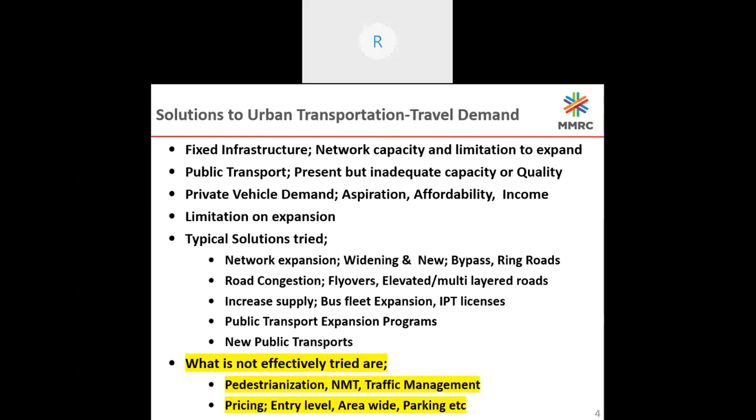So this explains the complexity of the urban transport problem. I would now jump into the Mumbai scenario, because I've been living in Mumbai and working for Mumbai Metropolitan Region for 30 years. That is my Karma Bhumi now.

Greater Mumbai, the metropolitan region, has 11 million public transport trips performed on a daily basis. The combined spread of public transport in terms of suburban railway and bus networks across various towns and bodies is reasonably good. For any of the Indian cities, Mumbai has some of the best public transport spread and network.

But the alarming situation is coming because of overcrowding on trains - it's almost three times the crowd that is going on. Then there's increasing private vehicle usage, quality of public transport deteriorating day by day, and as a result there is a spillover onto private vehicles, which has increased peak hour congestion and traffic congestion.

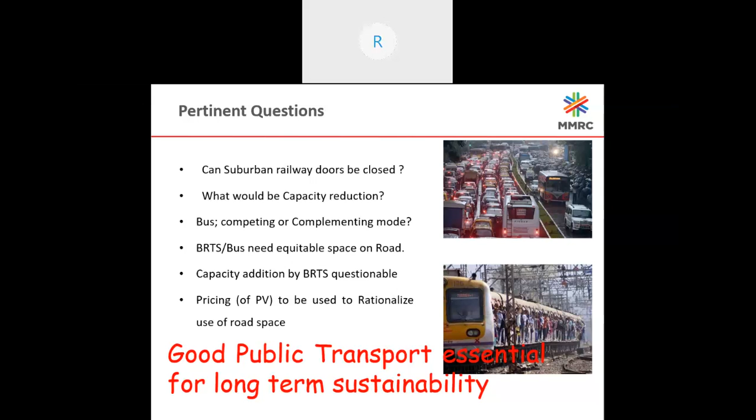BRTS has been thought of but not really implemented. Pricing of private vehicles to be used to rationalize the road space, including parking, but these are not getting implemented as possible. Good public transport is the only solution for the long-term sustainability of cities.

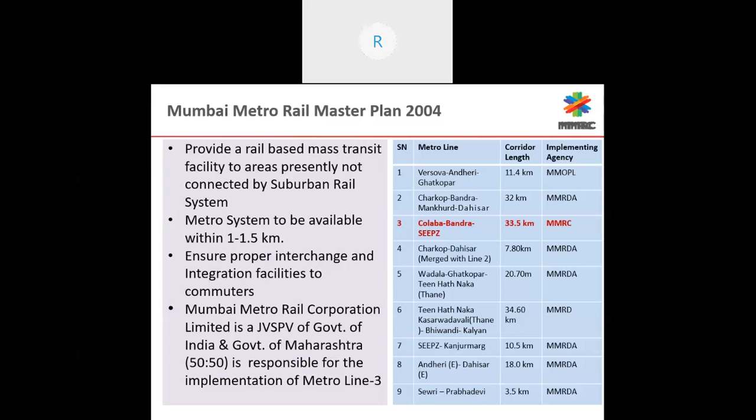And there has to be a public transport station in 1 to 1.5 kilometers throughout the city, ensuring proper interchange between various modes of public transport, including creating multimodal transport integration.

Of course, this network, the metro master plan, has been recently expanded to 150 kilometers network plan with a number of lines, 9 to 14 lines. I am not going into details of this.

So line 3, which I am going to speak about, is the Colaba Bandra SEEPZ red line alignment network. So the red line is line 3.

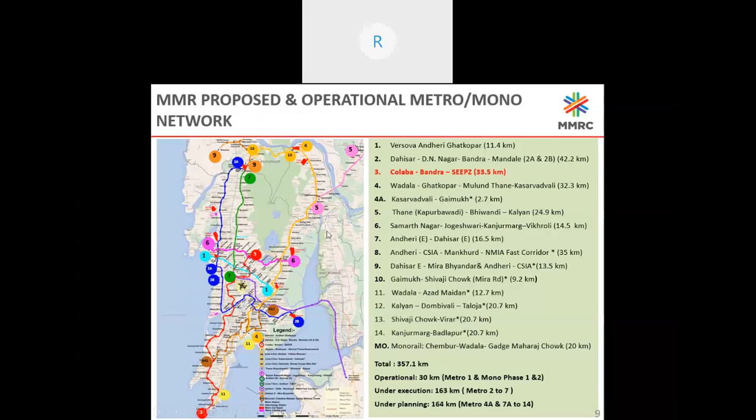So let me go on to the Metro Line 3 area I intend to speak about today, and the challenges we have faced, and how the planning process has gone through. To understand this network, it is a 33.5 kilometer network with 26 underground stations and one at-grade station.

The project cost, when we got it from the Government of India, is 23,136 crores. Near about 57% funding is coming from that. Rest of the funding is coming from the state government.

And of course, the airport concession is also taking a little burden on that. The project implementation was originally scheduled to be around December '21 for the first phase, and June '22 for the second phase. Of course, the Corona COVID situation may take some few more months.

If you want to look at the ridership, in 2021 the line is expected to cater to 13.9 lakh commuter trips daily, and that is expected to grow to 17 lakh. Accordingly, the fleet, that is the rolling stock, is continuing to 31 trains.

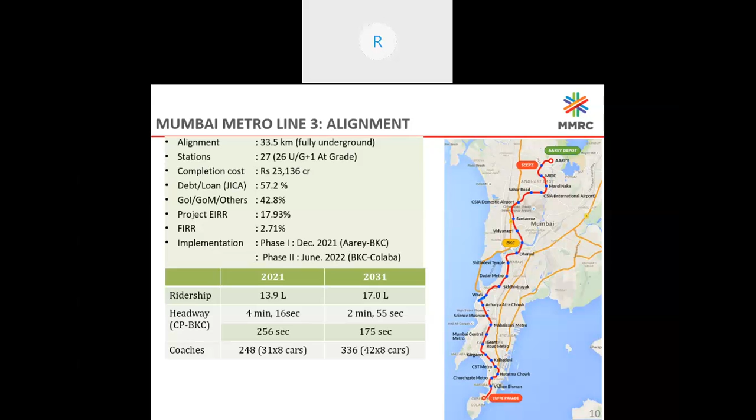Ultimately, we plan to introduce 42 trains. So what does it take for such a mammoth mega project in planning and implementation? I'm going to now focus on the challenges that we have encountered and surmounted in implementing this project.

So in an urban scenario, or for that matter any public funded project, the challenges are more or less common: project feasibility and funding, followed by implementation and an organization to implement it, procurement process and having good contractors on board, then implementation monitoring and project delivery schedule.

Then, since it is a spine-like public transport system, the supporting network, multimodal integration, and last mile connectivity matter, and of course the soft things like fare, non-fare revenue, and ensuring the sustainability of such a system.

In project feasibility and alignment finalization, as I have already mentioned, we created a master plan in 2004. But by 2010-11, when we really started working on this line, there were several things that had changed and several aspirations had changed.

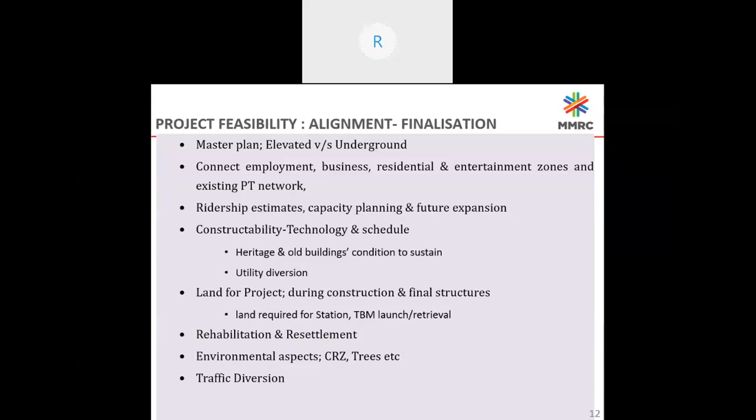The city of Mumbai is full of slums and other infrastructure, so rehabilitation and resettlement is an important factor here. Environmental aspects matter too, being a coastal city—there are tree issues and other environmental issues. And implementation of the project faces the challenge of traffic diversion during construction.

So the alignment has been finalized. While finalizing, we took care of all these aspects, and an alignment has been finalized. So we went to the next steps of the project.

The issues are environmental and neighborhood issues. One may think the city would wholeheartedly support a public transport project like an underground metro system, but I should say yes and no both, because residents get very aggravated—their daily activities are compromised, their emergency services are compromised, and they had to confront the movement of construction trucks and workers and several other things.

Under environmental aspects, we had to go through CRZ clearances—environment and forest clearances, because some mangrove forests had to be cleared—then tree cutting permissions, transplantation permissions, noise, dust and air quality monitoring systems. Air vibration studies have been done, and the construction methodology was decided to limit vibration levels.

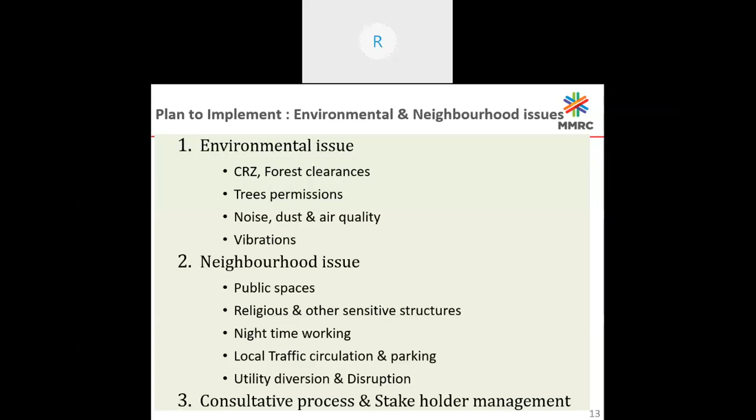To address all these issues, we have undertaken a consultative process right from the start, and it is still continuing. Stakeholder management is an important part of our regular project implementation.

The legal framework and policies are also important. Being a Metro Railway, the central legislation, the Metro Railway Act, needs to be applied. Then the Land Acquisition Act changed in 2013, so we have to apply that. There also has to be a rehabilitation policy in place—we have to apply the World Bank rehabilitation policy.

The government decided to implement this project under an SPV model, MMRCL, set up as a joint venture of the Government of India and Government of Maharashtra. Therefore, the Companies Act and its requirements come into play, along with various other legal compliances in terms of labor laws and other things.

We had to negotiate a lot of public issues. We also had to use some provisions of the Government of Maharashtra generally used for vital public infrastructure, declaring it a prioritized vital public project, which has helped us in getting a lot of clearances and approvals on track.

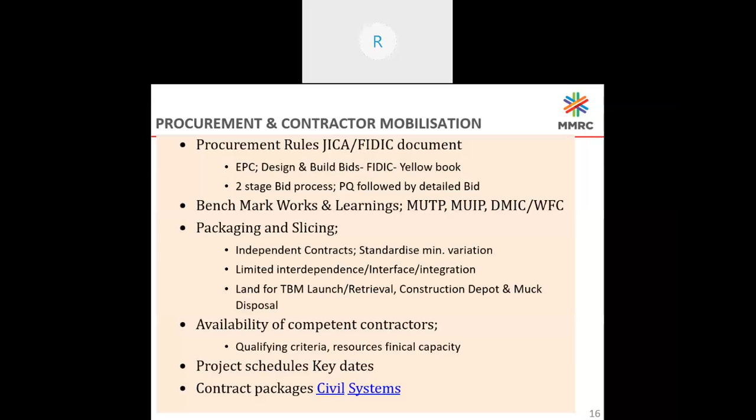These are the civil packages - the 7 contracts which have on average about 4 to 6 kilometers of tunnel work each, and every package has a minimum of 3 up to 5 stations. For example, package 3 has 5 kilometers of tunnel and 5 underground stations built by cut and cover method. Package 4 has a 6.8 kilometer longer tunnel but only 3 stations. So all 7 packages have been finalized like that.

We have got a reasonably good contractor through a joint venture with an international contractor, and we also have a civil depot contractor.

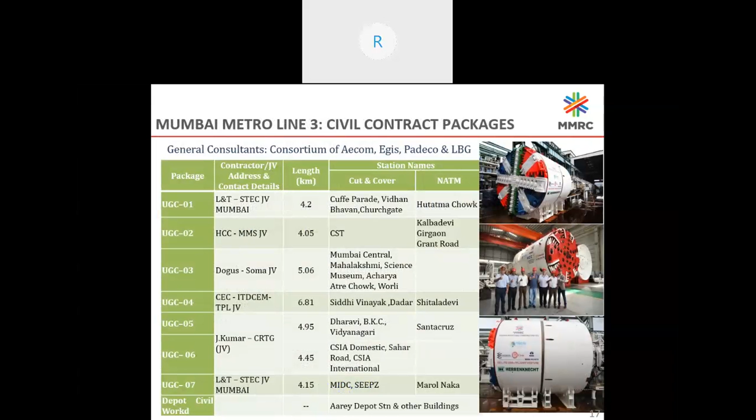There are various systems that go into a metro project. Track work, ballastless track for the entire tunnel section as well as the depot area. Then overhead contact power supply traction system.

It's an electrically tractioned metro track. Then power supply, arranging the power supply from nearby substations or building substations. So the power supply contract including switching systems, auxiliary and main substations, SCADA, etc. is part of package level B.

Then signaling, train control, platform screen doors, public address system, and communication is one package. Then station security system, because nowadays metros are considered a very high security heritage zone, so we need automatic fare collection system, going to the ticket vending system as well as collection and validation.

And tunnel ventilation and air conditioning system, which is called environmental control. Then lifts and escalators at all stations. Then finally the trains, which is called rolling stock.

So in these system packages, while in civil we adopted the geographical limitation of the land, in system package we use the type of the equipment and supply and work, and also the geographical limitation. For example, the tunnel ventilation system is divided into three packages which are spread over point A to point B like condition. But the tunnel ventilation and air conditioning are together.

Then project completion, testing and commissioning, these are part of the project delivery. As I told, this is the public transport final network that is being built. So to cater to the larger geography of Mumbai, we need to plan and implement multimodal integration and last mile connectivity.

This particular aspect is now under planning as we approach the completion date of the main project. So this integration includes physical integration between public transport and the feeder network or public mobile and other modes. Then fare policies try to bring uniformity among the fares of all public transport.

Then access and dispersal modes, as I said, a feeder system is going to come, which needs land availability, and if there are feeder public systems, their schedules have to match with the metro schedule. Then auto and taxi stand, and non-motorized modes like cycle stands or any other modes, then walkability to the station - these are being addressed. So parking in and around the metro station area, short and long-term parking, and its pricing and management.

Organizational integration is also required because the buses are operated by different entities. The private fleet or maybe IPT like Ola Uber has a different mode of operation. So between the organizations there are regulations, and if there are any issues between the two different modes functioning together, there has to be some disputes to be resolved.

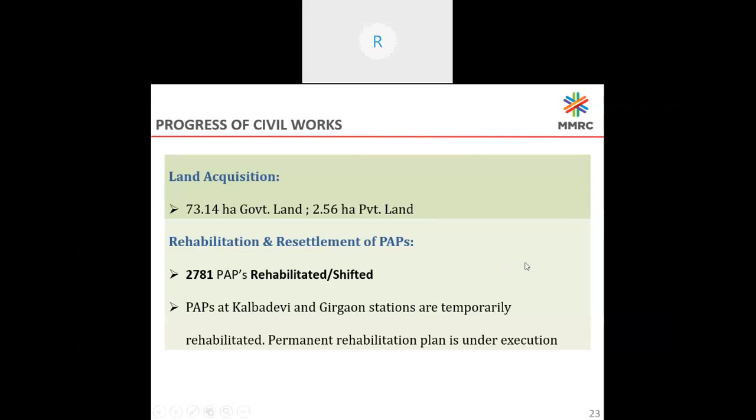Okay, so pre-engineering activities before project. We had to finalize engineering design and undertake near about 400 material testing and traffic service and building condition surveys. I'll quickly go through these things because I think we are running out of time, I don't know how much more we have.

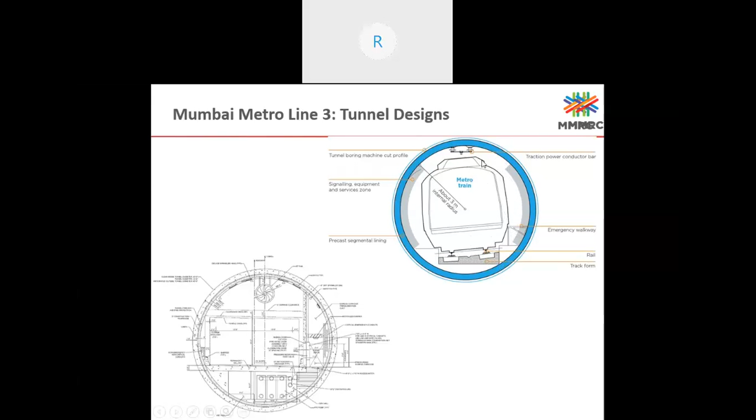So this is typically the tunnel design. The bottom image is the completed tunnel with features getting installed, and in the top right image you can see the tunnel with the lining. This is a section at a super elevation point showing how the track will be located, the alignment, and the overhead catenary.

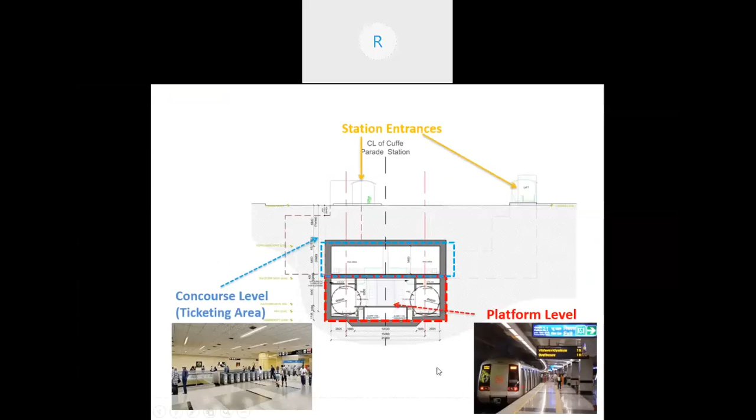Typically, underground stations have two levels: concourse level and platform level. We have adopted different types of station design.

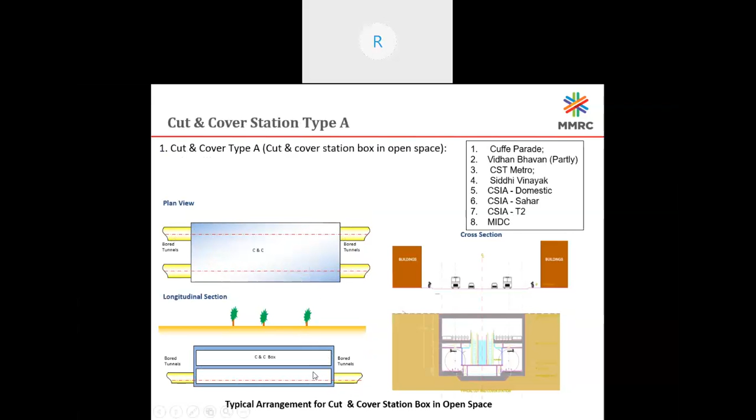Then you have cut and cover type 2, where the station is located within the roadway, and the brown or orange boxes on either side are existing structures. These are also cut and cover. So together there are about 19 cut and cover stations.

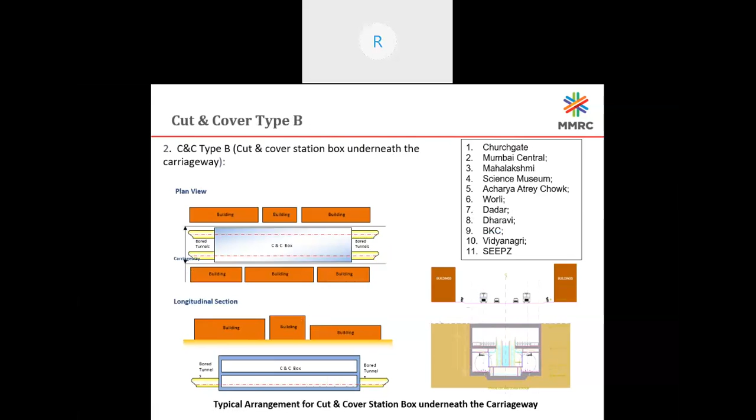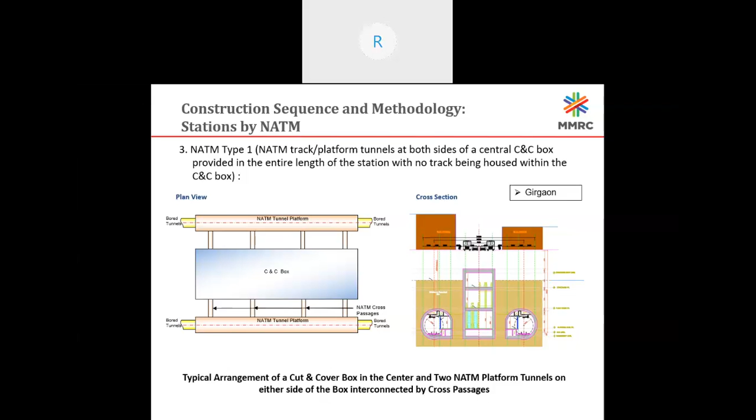Then the difficulty level increases with other stations not having any station box directly. For example, Girgaon is a cavern and cut and cover with a huge amount of cavern work involved. You can see the narrow box in this tunnel provided. Then we have four stations where one tunnel is outside, another tunnel is inside the box, and the cut and cover is done. Connectivity between the outside tunnel and the box is done through a cavern.

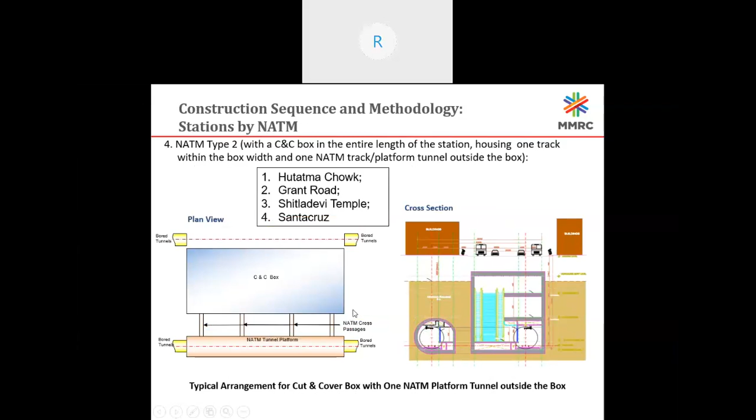Cavern work becomes important here. Then there is one station where we are crossing Metro Line 1, which is limited, so we can't have a continuous box. We are doing two different boxes, and the tunnel is outside the box.

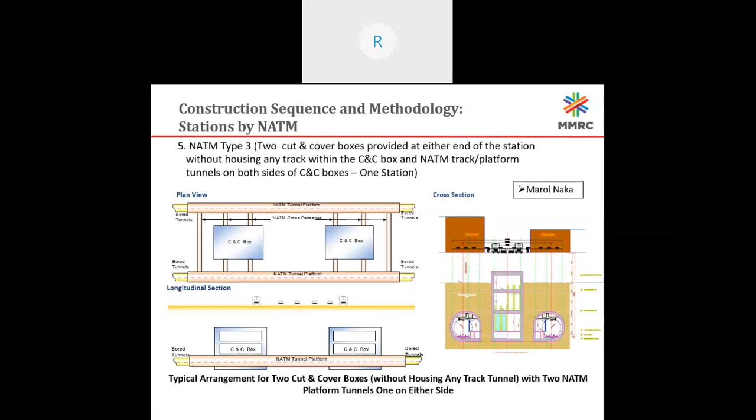Then we have a very complex station at Kalbadevi - two small boxes connected by a cavern tunnel, and the metro alignment tunnels are outside the boxes. There are a large amount of caverns. This is the area where I said we are acquiring lands and doing the initiative. So this is one of the most complex stations we are implementing.

Geology - Mumbai is a coastal city, has a different graded underground complex geological system with heterogeneity varying at various locations. Largely it is considered basalt, but there are varying things - there are agglomerates, volcanic breccia, and laterite.

There is a lot of - as I told, near about 400 boreholes and excavation pits we have done. The samples have been tested much before the bid process is done. We also run into a few coastal faults or deteriorated fault lines, which are going through some of our stations, so necessary treatments are to be included in the station design or tunnel design.

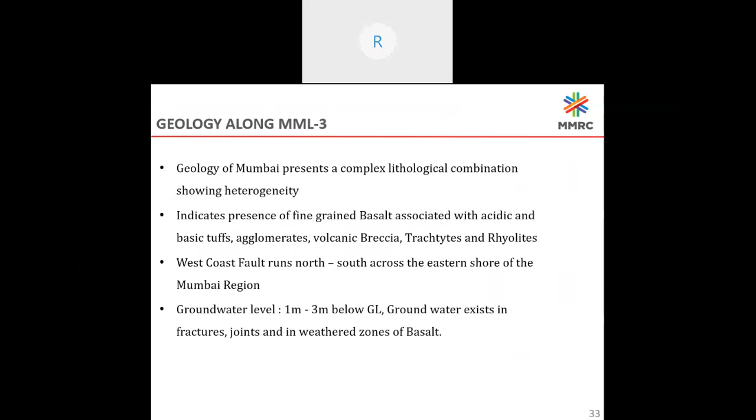Typically, near about 12 stations have groundwater level at 1 to 3 meters below ground only, meaning we have a very high water table close to the construction zone. These are the geological requirements that we have addressed.

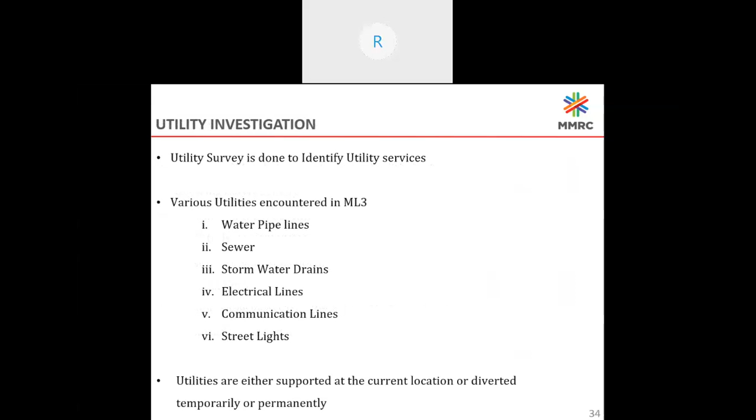Then, as I said, there are a huge number of utilities - 28 different types. All utilities have been mapped before the bid process started, and these utility maps are given to contractors. Suitable provisions are made so contractors should address all the utilities within the construction contract only; any new utilities encountered will only be paid as an additional.

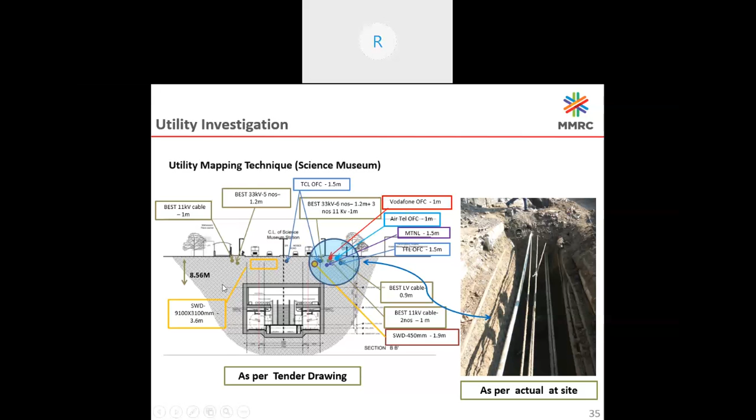So typically the utilities - you can see the number of utilities. There is the power cable of BEST, power cables of Tata, then Vodafone, Airtel, MTNL, then other OFC cables. These are only cables. Then there are underground water pipes, water lines, stormwater drains. You can see here another example of how utilities are being handled.

So existing utilities certainly are a major challenge. After construction, we also need to create an as-built drawing of all utilities that represents the metro, so that tomorrow if a utility needs to be refurbished or repaired, the metro system should not get affected.

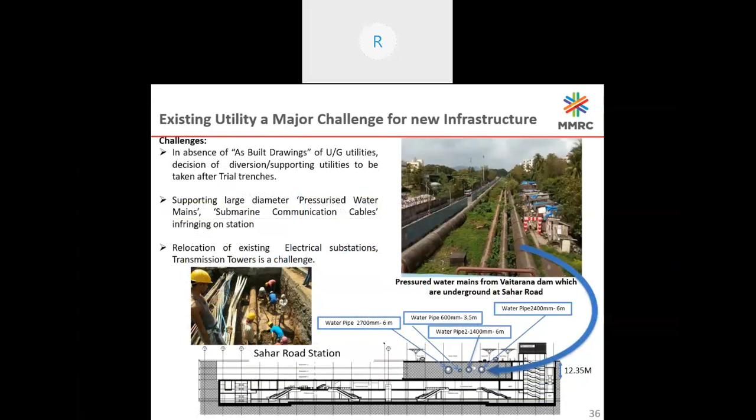Building conditions survey. As I told you, we have near about 500 plus old and heritage buildings next to the alignment. So we have done a building condition survey in five categories. Category five is the severe category where the building may have to be evacuated during the construction process.

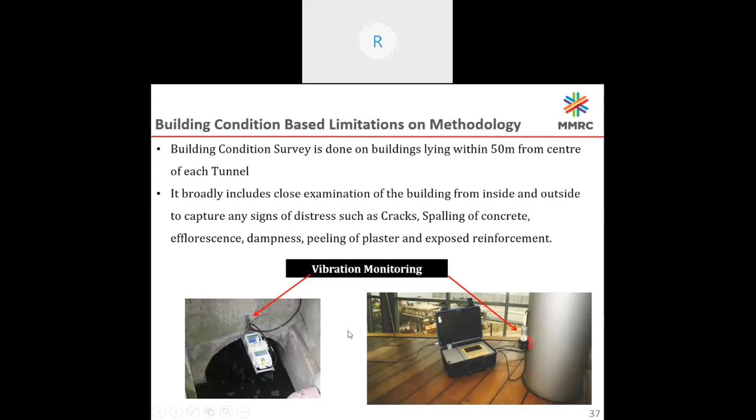But all the buildings will be fitted with monitoring systems - it may be a vibration monitor, a crack monitor, tilt monitoring, and piezometers installed to check the water levels if there are open wells or bore wells. So all those things are in place, and it becomes the contractor's responsibility to ensure the building is safe and minimize damage.

So for the existing buildings, another important thing is it's extremely difficult, or rather impossible, to ensure that the entire alignment outside any building is not affecting any building. At places we are going very close to buildings, or passing below some buildings, but we have ensured we are much below the foundation level of existing or future buildings. So we are crossing flyovers, crossing railway lines, going below heritage buildings, going below proposed development.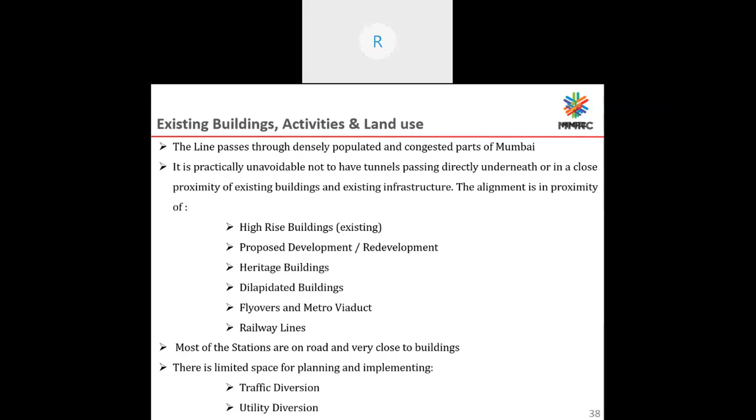So simultaneously, we also are required to do special construction, mostly where we are excavating 20-meter deep excavation next to the building. And there is traffic diversion, if diversion has to happen.

Just to explain, those who understand the traffic numbers can see the traffic numbers in the last column, and the number of available lanes. Within that, more than 50%, or sometimes 100%, would be used by the construction team, and this traffic needs to be diverted. This is the peak hour traffic, so you can understand how much traffic diversion activity we have to undertake.

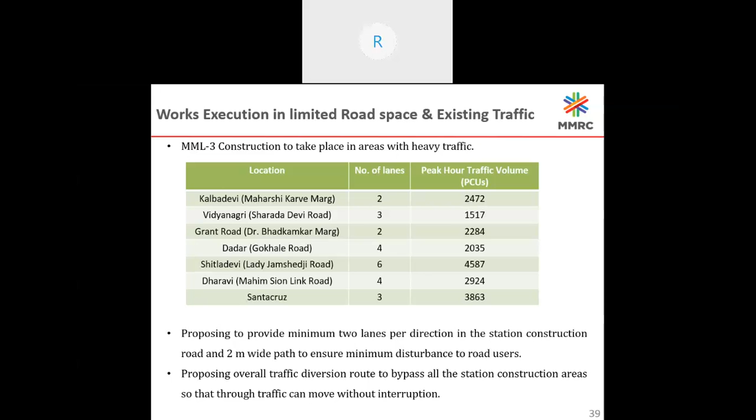We have to deploy traffic marshals - near about 1,500 traffic marshals to manage the traffic. These are deployed by the contractor.

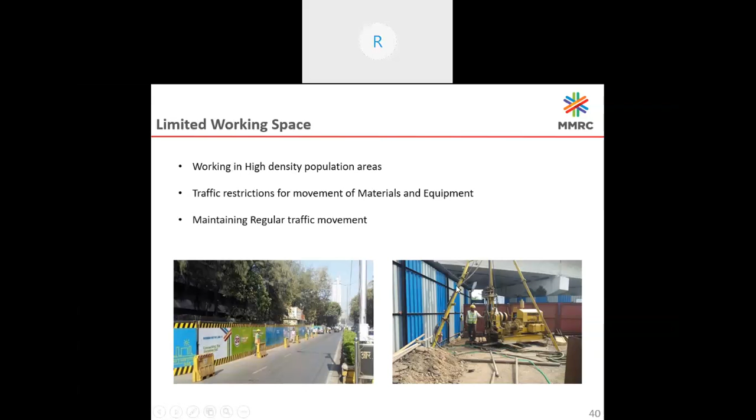Limited workspace in the city, so we need to do barricading and protecting. You can see we are doing something below the flyover. Proper barricading needs to be done to safeguard the workers and the city traffic from the construction activity.

Traffic management and diversion plans are prepared much before, analyzing how the traffic loads will change. These studies have been done by all the contractors.

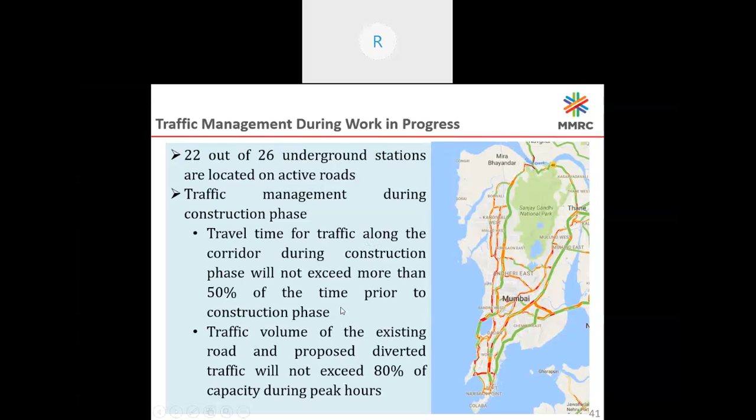Muck disposal is another important feature. We are generating near about 11 million cubic meters of tunnel and station muck during construction activities, and this muck has to be disposed to different locations.

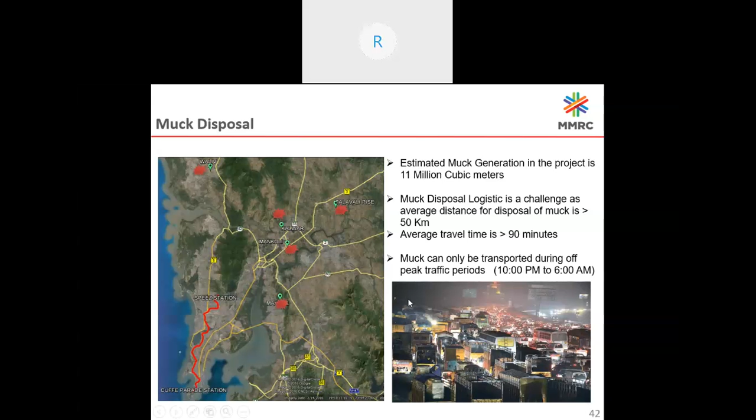In the construction zone, construction safety is another important factor. We have given very high trust in the contract document as well as the contractor orientation program - safety orientation, training, and skilled and unskilled worker training are important. Without imparting necessary training for a stipulated period, no worker or engineer will enter into the site. This is a mandatory requirement kept in the contract document.

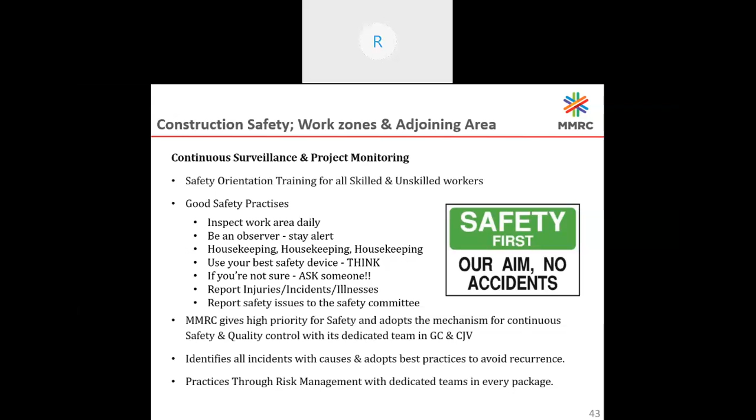The contractors scrupulously follow this. Apart from that, good safety practices include daily inspection of work areas, housekeeping activities, and a lot of other things. People are motivated through daily lectures, toolbox talks, and other things. We can proudly say we had just one accident involving a major engineering casualty - otherwise, the entire project is being safely conducted.

As I said earlier, building condition and building safety monitoring is also a separate feature under the contract. When stations and tunnels are being constructed close to buildings, monitoring happens for the entire period of construction - 3 months before and 3 months after. This ensures the buildings are safe, and if there's any feature of concern, we evacuate the building. We have evacuated two buildings this way before any casualty or collateral damage happened, and the residents are kept at private places.

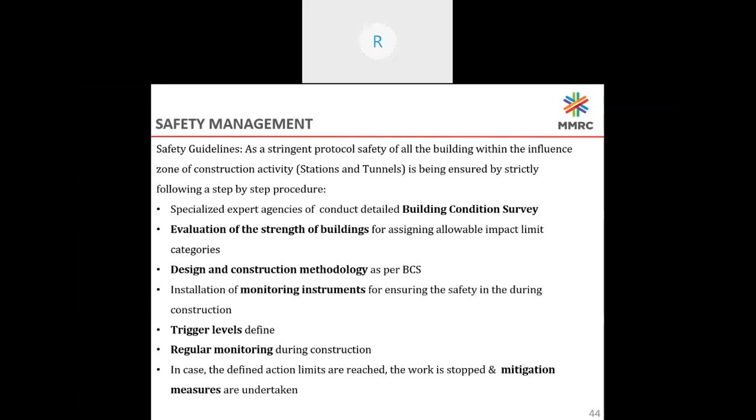Environmental measures - work to be carried out within the barricade is one of the important things. There has to be dust control measures; we have done prior-to-construction studies so they have to achieve that level. Vehicle tires are to be washed whenever a construction truck leaves the construction site, muck disposal is to be done in closed trucks, roads around the construction site are to be cleaned regularly, and groundwater recharge is done because of the excavation and tunneling.

And to have a better noise level, they have stipulated age of the construction equipment. So that is how we can actually reduce the air and noise pollution.

So just for example, we are watching each and every truck that enters the construction zone, and ambient air quality is monitored on a regular basis. A reporting system is there - wherever quality goes down, construction is stopped.

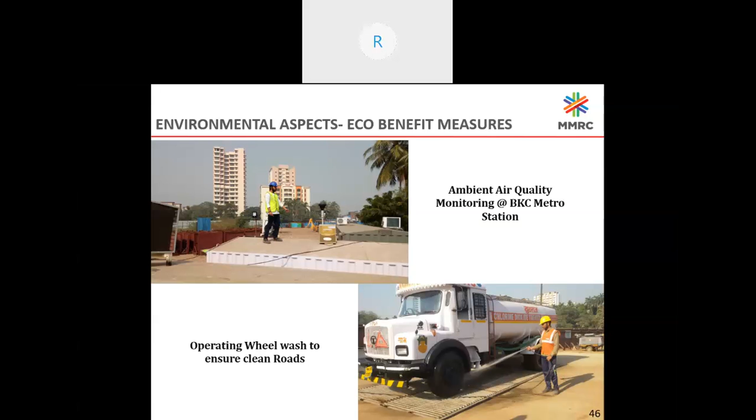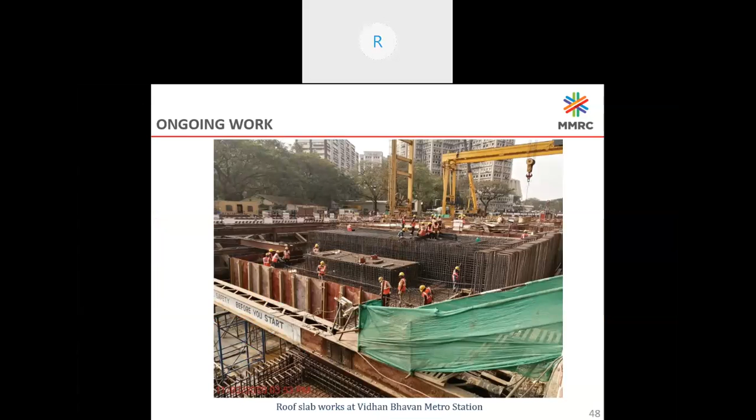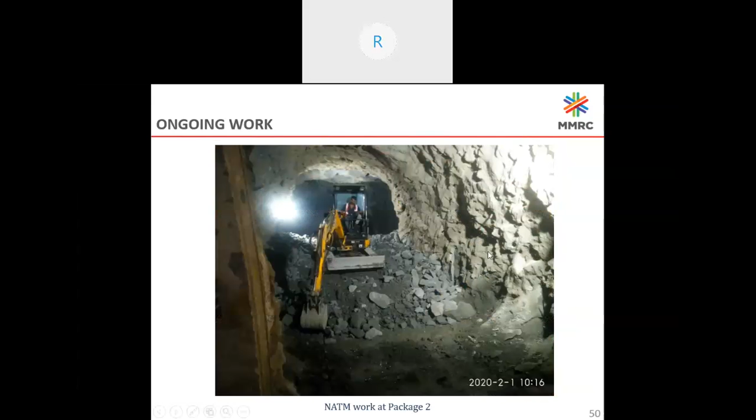You can see manual excavation that is happening. One station is very close to a very old and sensitive building - this is close to our Vidhan Bhavan. You can see a deck, road deck created over the station box to ensure smooth flow of traffic. You can see high-rise buildings in the nearby vicinity.

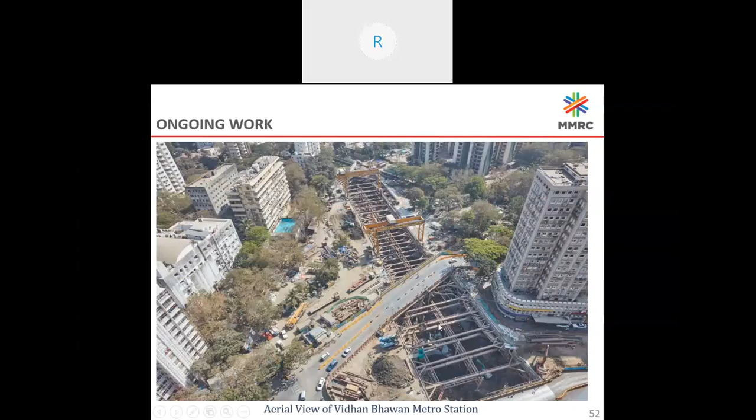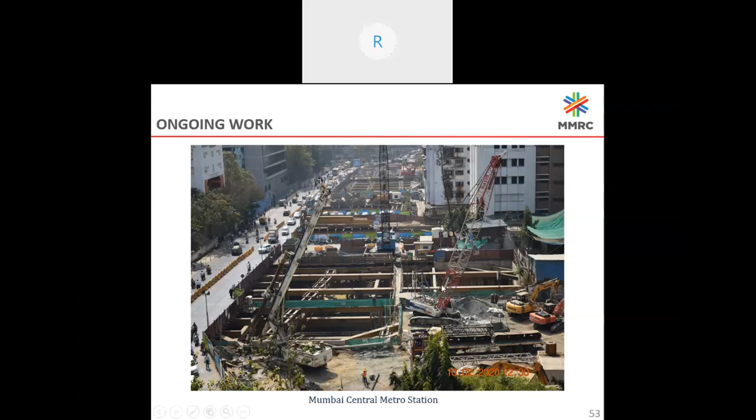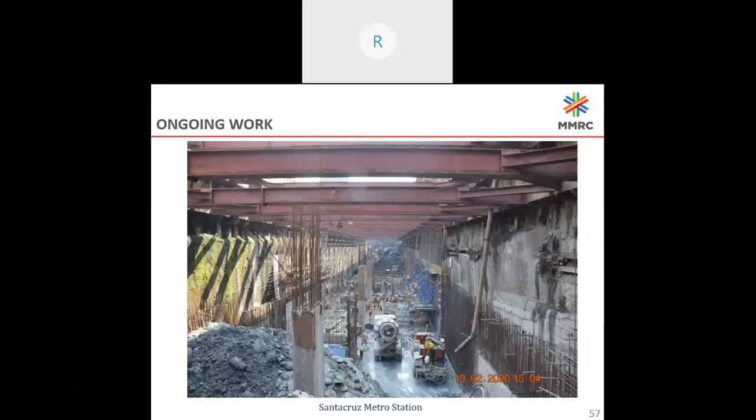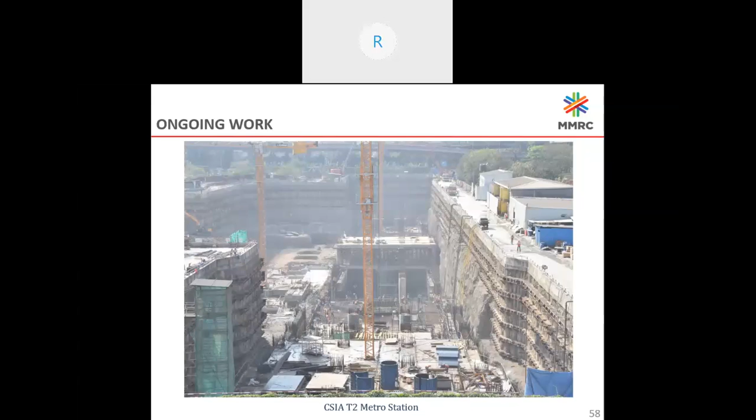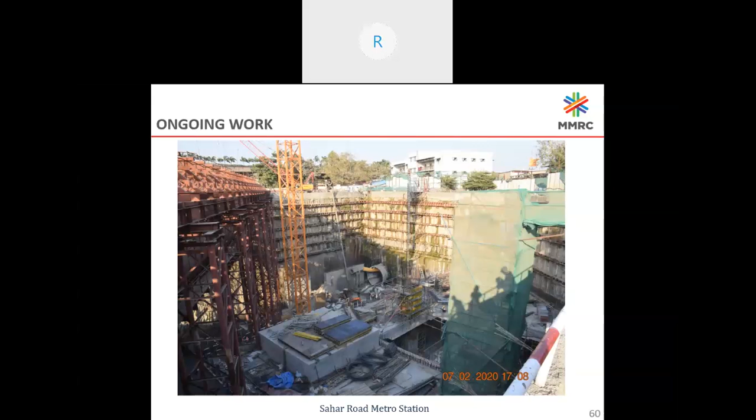The NATM tunnel finishing work - you can see here the tunnel already completed, bottom left hand side, almost finishing level that has NATM work.

I am trying to link some of these videos. I will upload them and show you during the discussion, just checking the availability of these.

Sir, a few questions are there. No problem - firstly, what is the latest technology that you are using in construction of the metro?

The TBM is the latest construction technology for tunnel construction. The TBM does the mechanical tunneling and simultaneously does the concrete rings behind the excavated tunnel. So TBM is the latest construction technology that we are using. And wherever there are any issues, we use grouting techniques at the tail end for any voids that remain in the tunnel.

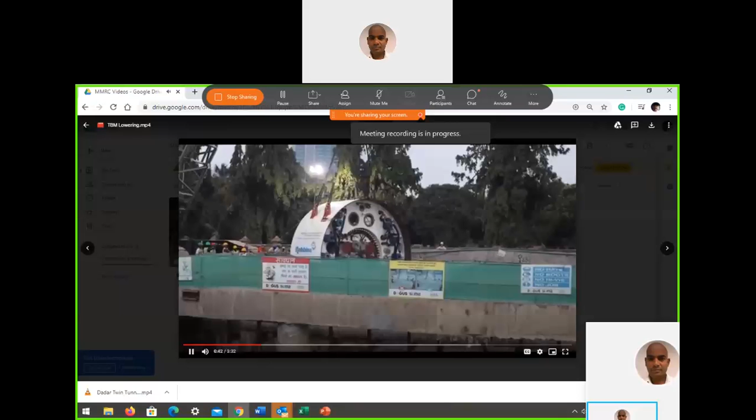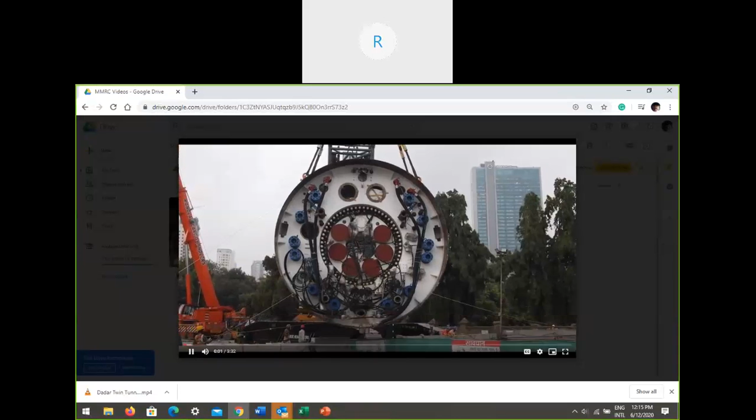Okay, this is launching of the TBM at one of the sites. This is the cutter head getting launched into the TBM launching area.

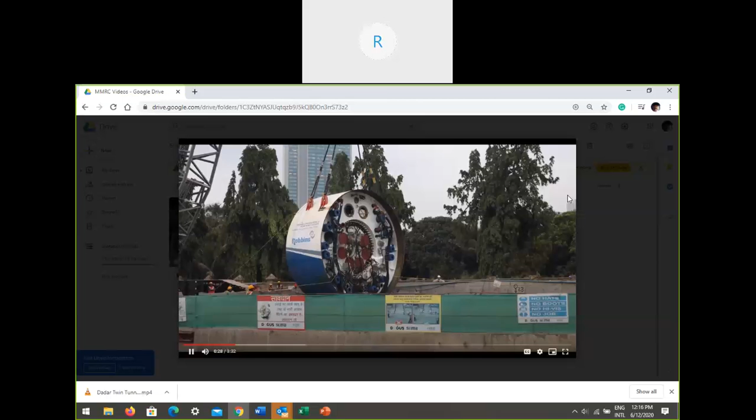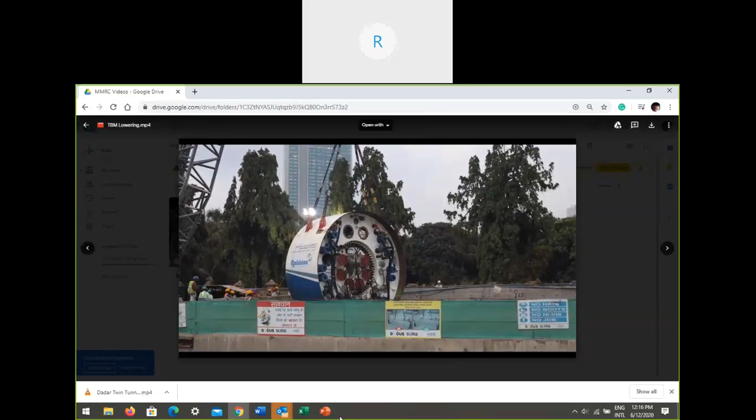I'm using some online video, that's why I lag in the uploading.

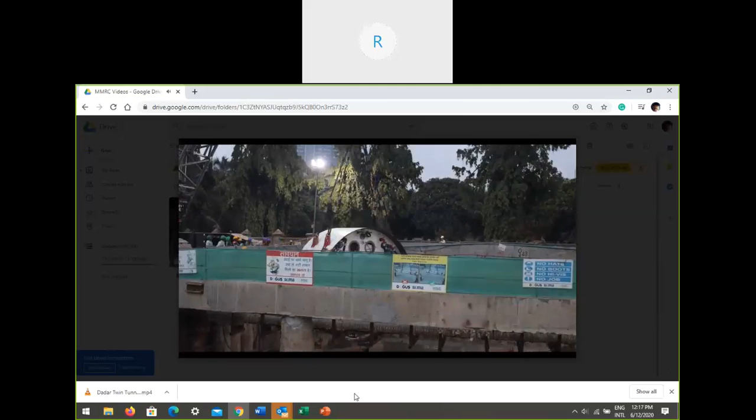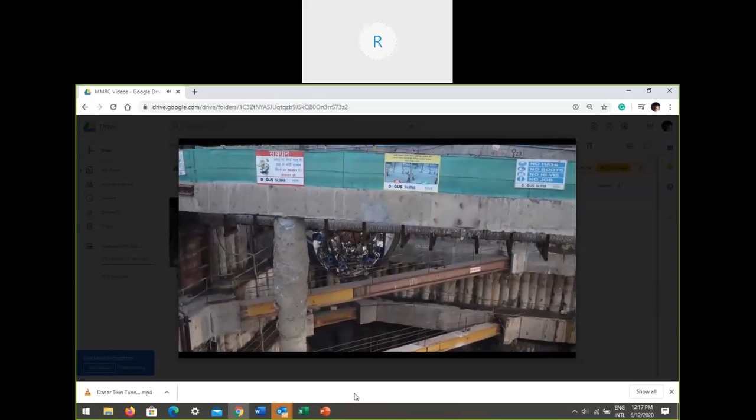The TBM launching site is prepared - the part of the station box itself is the launching site, into which the parts of the TBM are being lowered. Once they are lowered, they will be assembled and the actual tunneling starts. You can see how congested the location is. Already one part has been lowered, and this is another part that is getting lowered.

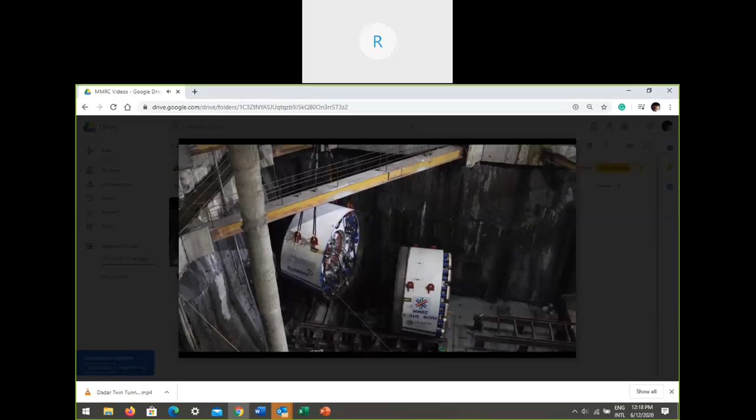So this tunnel boring machine is generally of 6.5-meter outer diameter. The cutter head cuts in the forward direction. On the tail end, the ring erection system is kept, so concrete rings in the form of 6 segments are prepared beforehand and they are launched from the tail end of the tunneling ring.

So there are videos available online - that's why I did not put the actual TBM working footage in detail, you can all see that going on, on the net.

In fact, one can visit our website also and see a lot of project progress related photos which we regularly upload there. We also have a Twitter handle on which we upload the project progress. We also regularly update our YouTube channel, and our website also has a lot of progress and project updates.

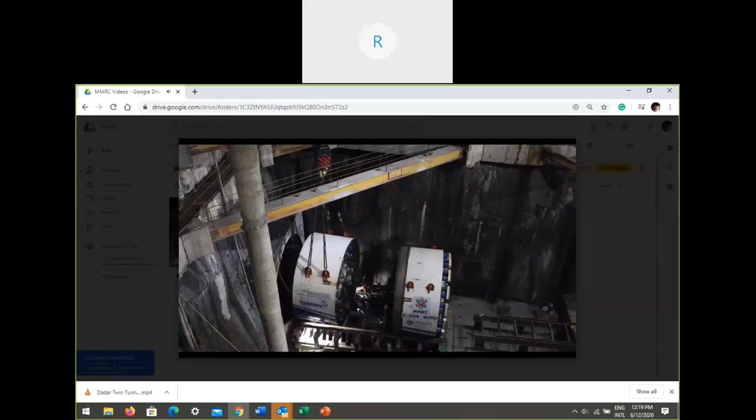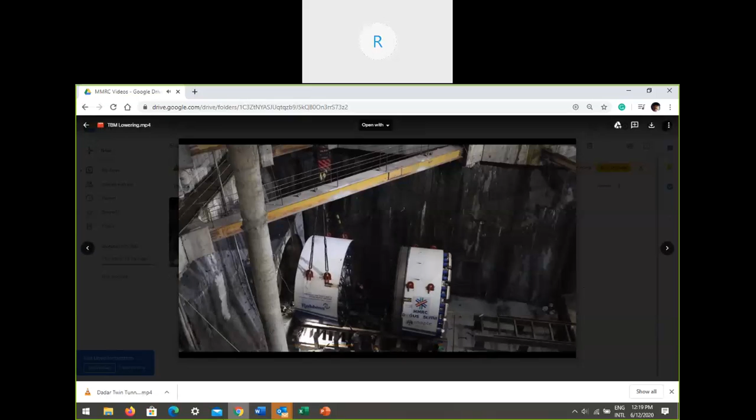Interestingly, we were also offering training programs for various engineering students in their final year, in the form of internships - summer internship and winter internship. If anybody is interested to send their students, they can contact us. We publish the notification - of course this year because of Corona, we will publish in December, but last December also we had it, and we may continue this internship program for another 2 more years.

Can you see this video? Yes, sir, it is coming.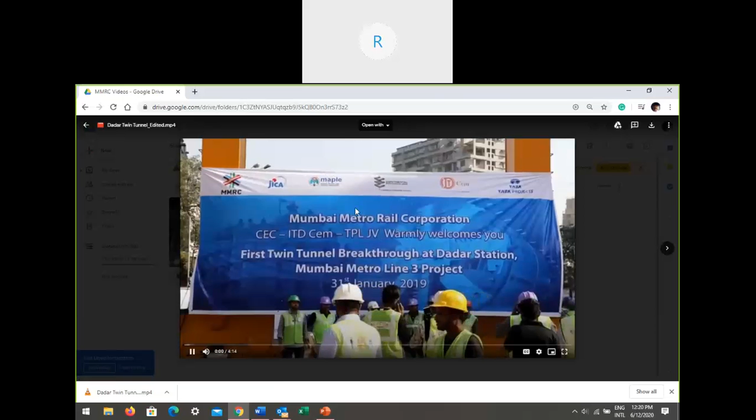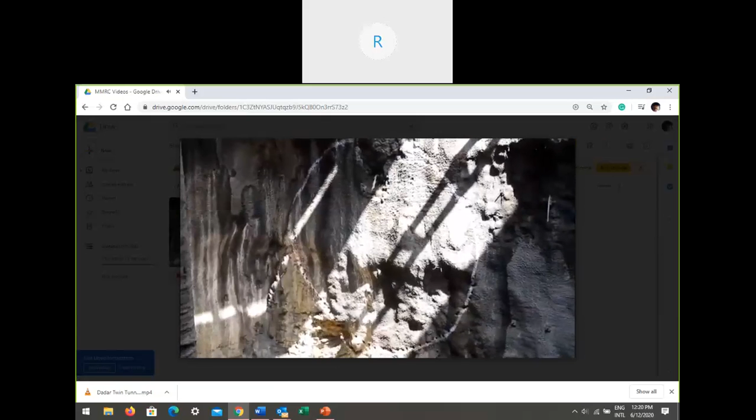This is near the Sena Bhavan in the middle of Dadar. We have done 2 tunnel boring machines, with breakthroughs happening simultaneously, one after the other. You can see the 2 rings working next to each other. It's a very congested area in front of the Sena office.

Inside, the tunnel boring machine is doing its last round of rotation with the cutter head, and then it breaks out the tunnel. This is happening 20 meters below. That is the cutter head moving at the bottom.

The water jet is there inside to act as a coolant when the cutting takes place, since a lot of heat gets generated. To keep the equipment at the desired temperature, water is continuously poured when the TBM is in operation. That is the water jet - there are generally 3 to 4 water jets inside the tunnel cutter head, so water is continuously flowing.

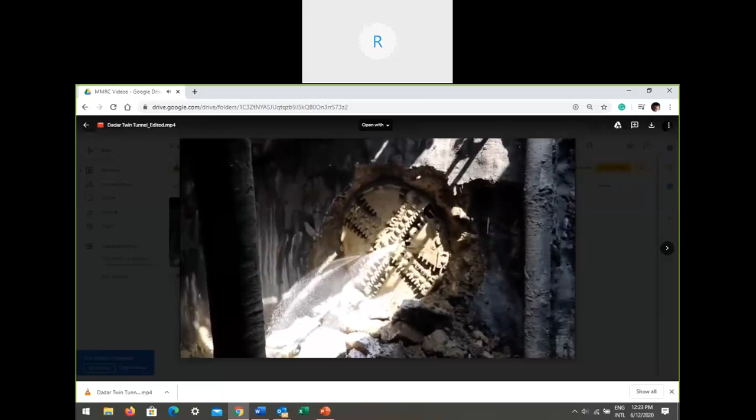The TBM is generally about 100-110 meters long, a machine built in parts. Once the construction tunnel breakthrough happens, the TBM needs to be removed from the front end. It cannot go back because behind it, tunnel rings are being erected. So the entire 100-meter TBM needs to be removed from the front end.

This is one TBM breakthrough that has happened. So within 10 minutes, we need another breakthrough next to that.

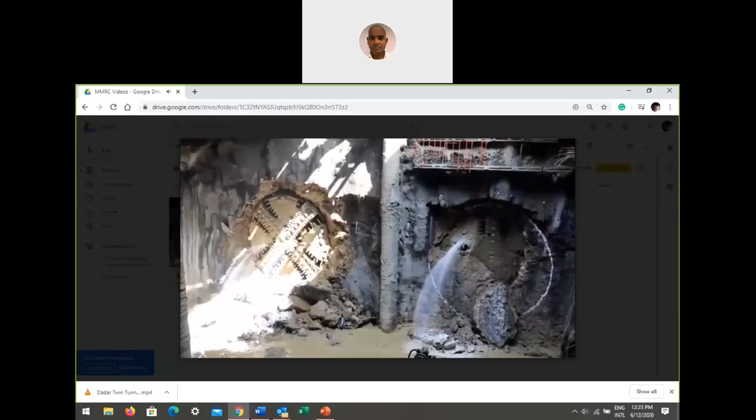I have another one - this is the finished tunnel I'm going to show. We can take questions as we see this. So this is the finished tunnel, you can see.

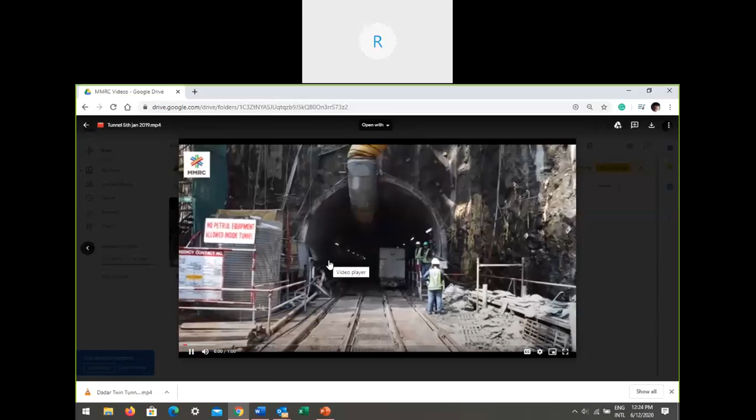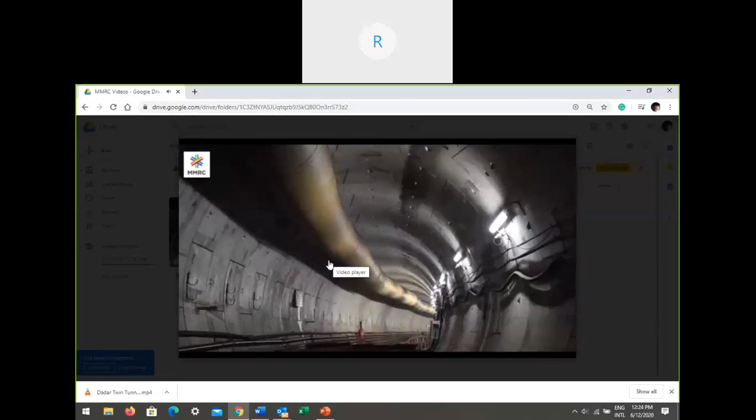These are the tunnel rings that are there, built by the workforce. It is 1.2 meters wide. These are the tunnel segments - 6 segments are put together to form the circular ring. Their alignment is such that even when there is a curve, that can be managed. The yellow portion on top is the tunnel ventilation.

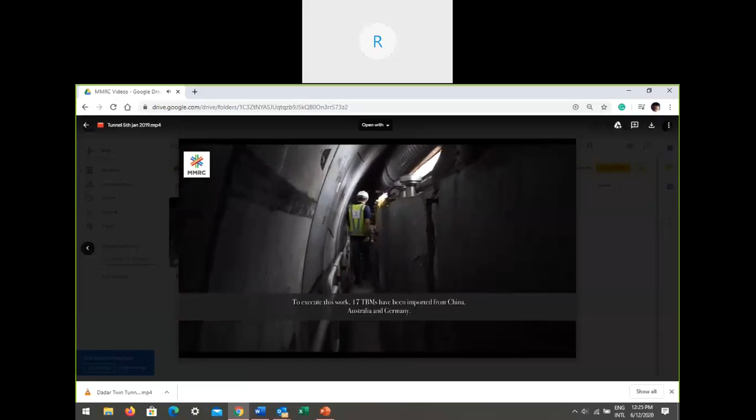This is the walkway for the workers, because in the middle the muck carrying train moves, and people are supposed to walk alongside the entire TBM, as I told you, the 110 meter long TBM machine inside the tunnel.

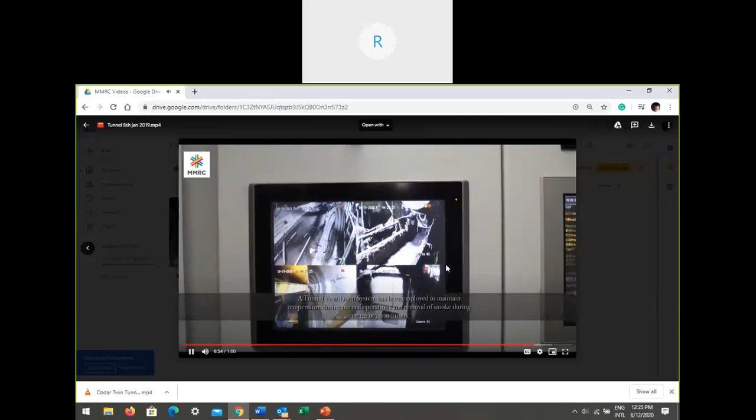This is the computer visual of the TBM monitoring system inside the TBM itself. This is inside the tunnel. This is the operator. Okay, I'm finished.